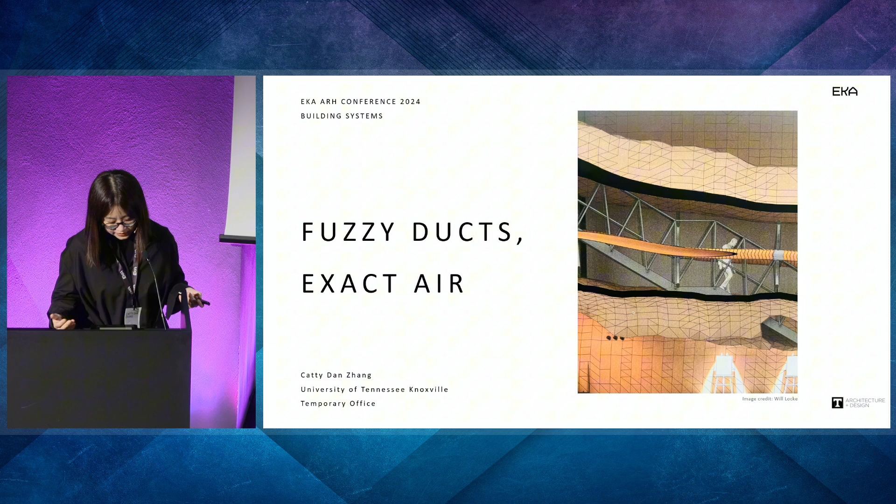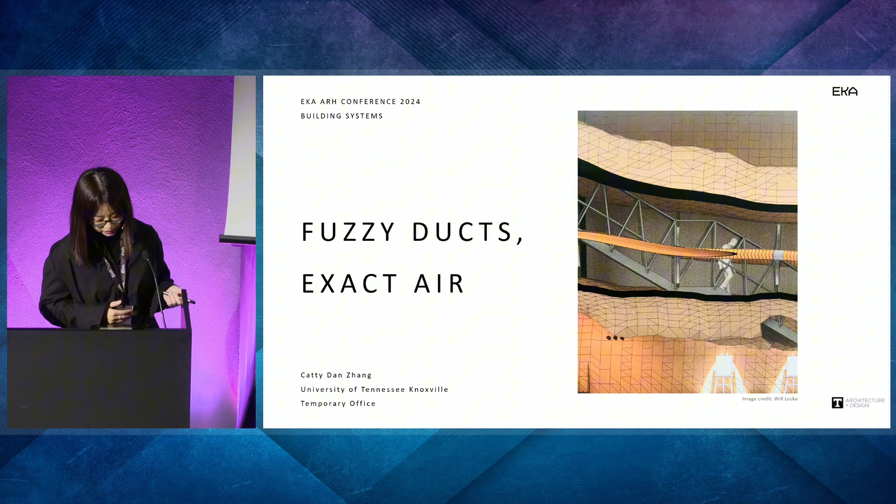It followed the theme Systems and Atmospheres in the curriculum map, which essentially is looking at system integration in building design, and the paper particularly documents the historical context and computational design method explored as part of the course, primarily looking at HVAC and building design to design architecture for air and for people.

Modern architecture employed exact systems, calculated, programmed, and optimized to provide exact conditioned interiors. The most notable example includes air exact, sometimes translated in different words, but essentially offering optimized indoor humidified air at 18 degrees Celsius all seasons.

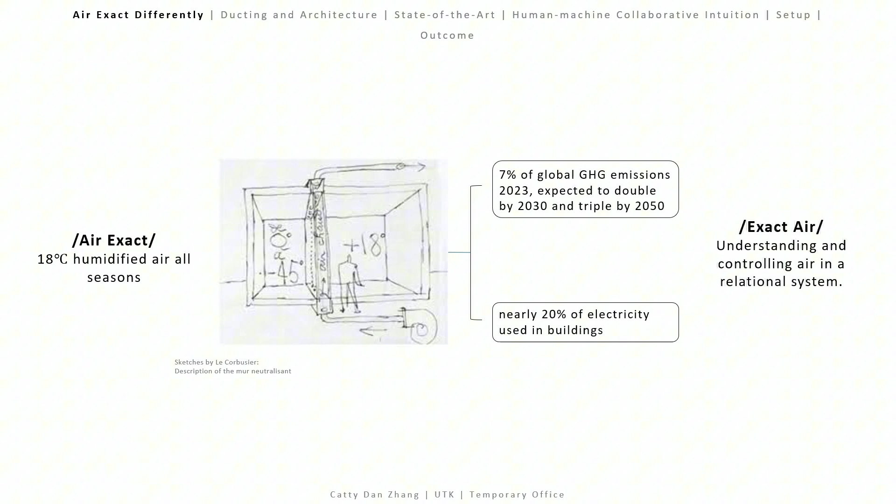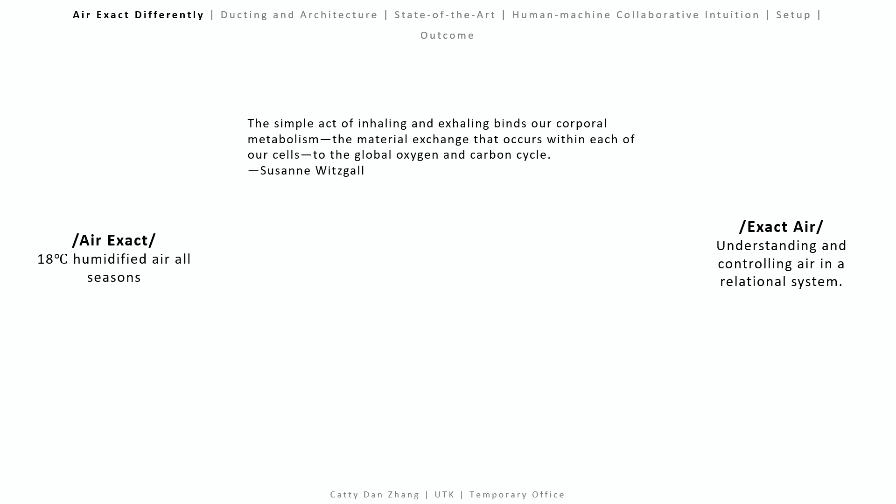We reconceptualize exact air as a critique of the environmental cost of cooling in the building industry, and we argue for the exactness of air to be understood and controlled in a relational system, not as a quantified output provided for inhabitants in space, but rather the specification of its dynamic attributes in the process of its creation and exchange. This is also about accurately recording air as a material moving through spaces modulated by natural or man-made systems, referencing some of the theoretical arguments in the field.

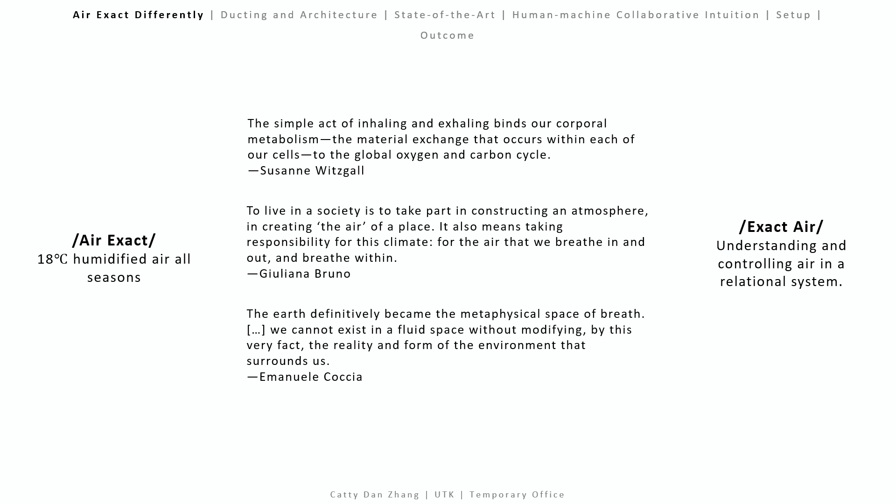For instance, Susanne Witzgall relates inhaling and exhaling to the global oxygen and carbon cycle. Giuliana Bruno stresses our responsibility of creating air for the climate, and Emanuele Coccia points out we constantly modify the reality and the form of the environment as we exist in the space of breath.

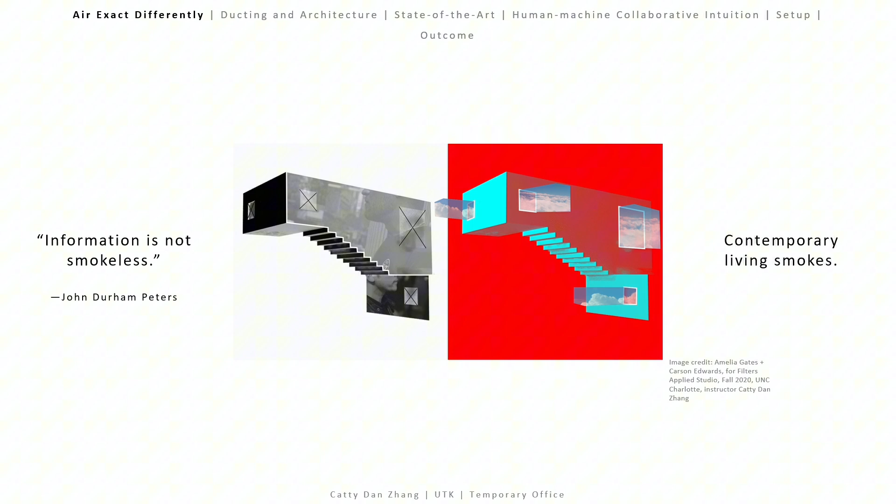As we create domestic personal weather mediated through cooling systems, we inevitably also contribute to the warming rate of the global climate. In that sense, contemporary living smokes, that's the argument we set up for the course, whether visible or not, literal or metaphorical, whether human breath and gas, or CPU and stove.

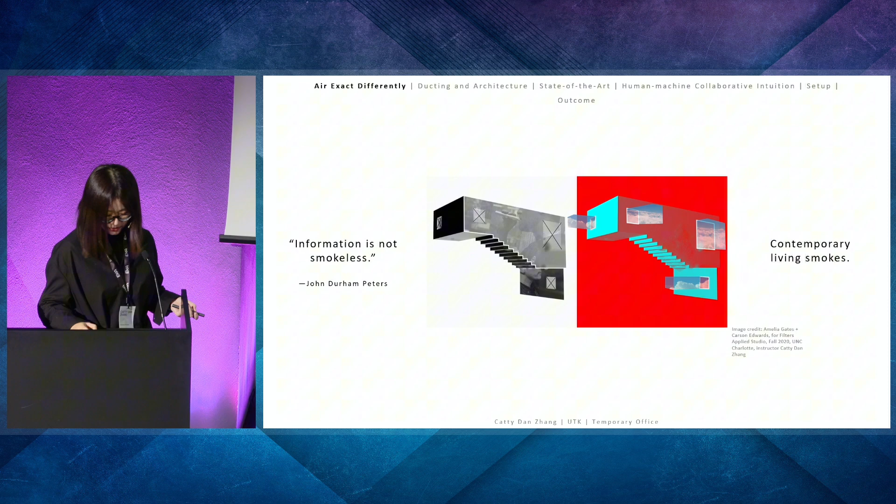And in the Fuzzy Ducts, Exact Air work, we particularly explored digital and physical smoke as architectural material that informs design workflow and decisions. The methodology builds upon systematic construction of air, which I have explored in my own work, as well as teaching, for the past almost a decade.

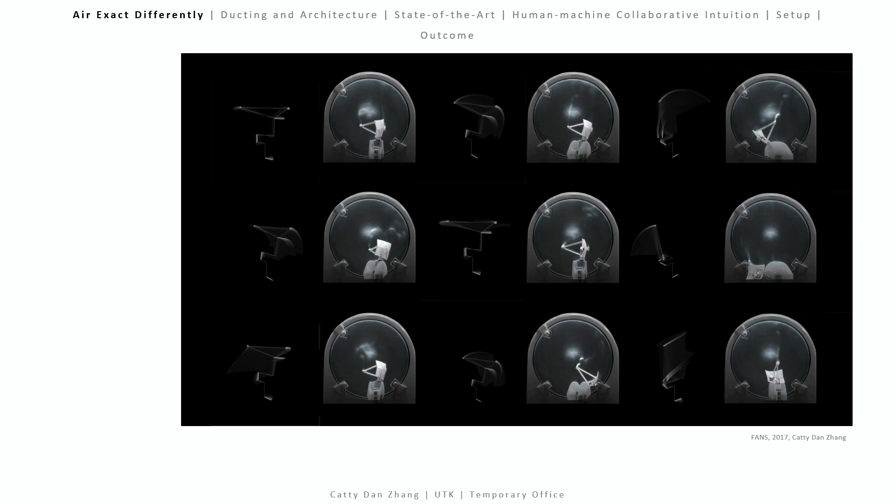These include articulating geometric construction of heat using customized robotic devices, expanding the relationship between points in space and the creation of lines, curves, surfaces, and volumes with the specificity of the materiality of air, as well as digitally revisiting Marey's smoke machine experiments.

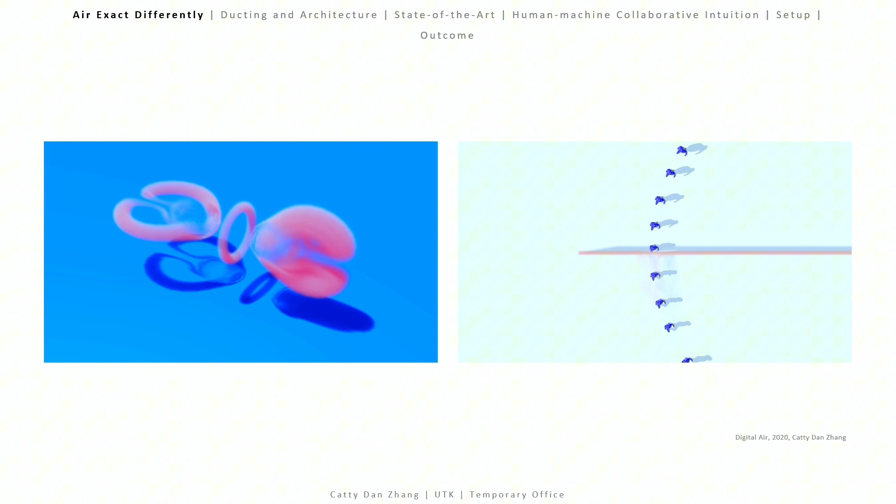Not sure if the video is somehow cropped, but you see a portion of it: constructing air styles that appear as weaving, kneading, knotting, braiding patterns, playing with virtual material attributes and physics principles. Modeling and simulating air forms to understand the material behavior and topological form making, and at the same time as indicators of other spatial effects, such as force, movement, geometry, convection, and so on, produced by human inhabitants or by environmental constraints. These parallel a series of pedagogical experiments.

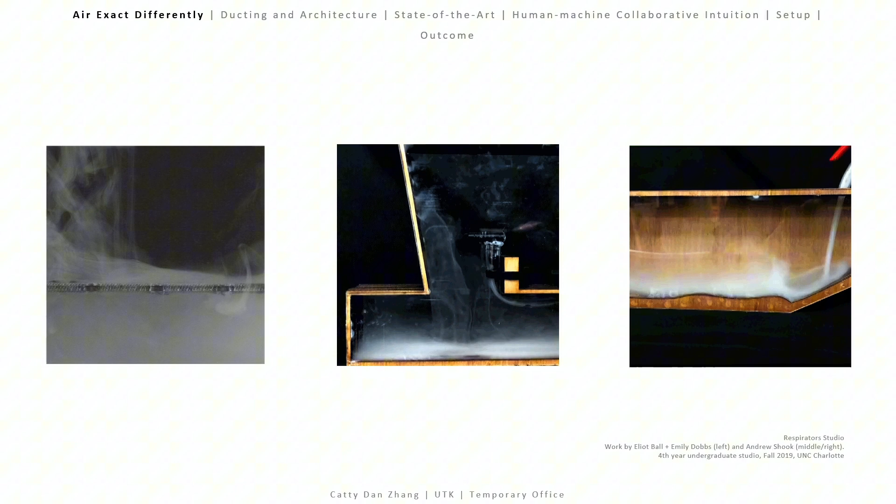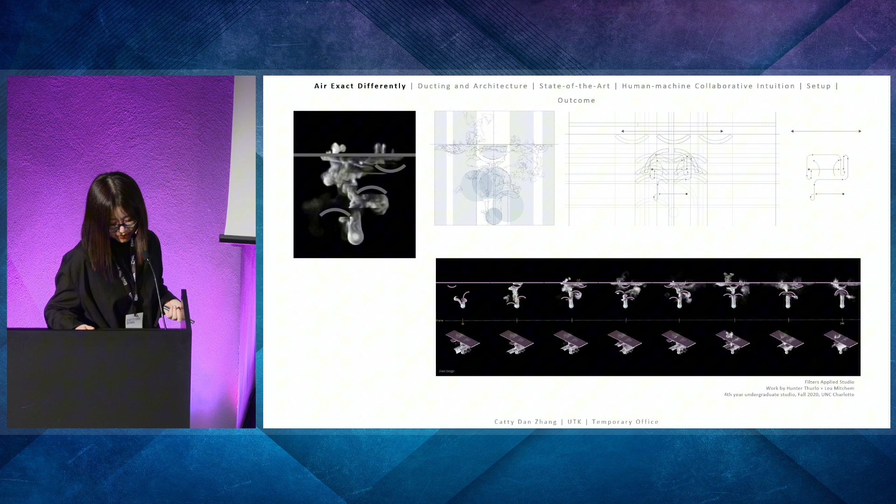In the 2019 Respirators Studio, we explored physical smoke and sequential space formation through arrangements of surface colliders. In the 2020 Filters Applied Studio, we explored digital hot air and the procedural workflow of drawing and simulating adaptable spatial systems through deconstructing filters and modulating the emergence of ephemeral hot air forms.

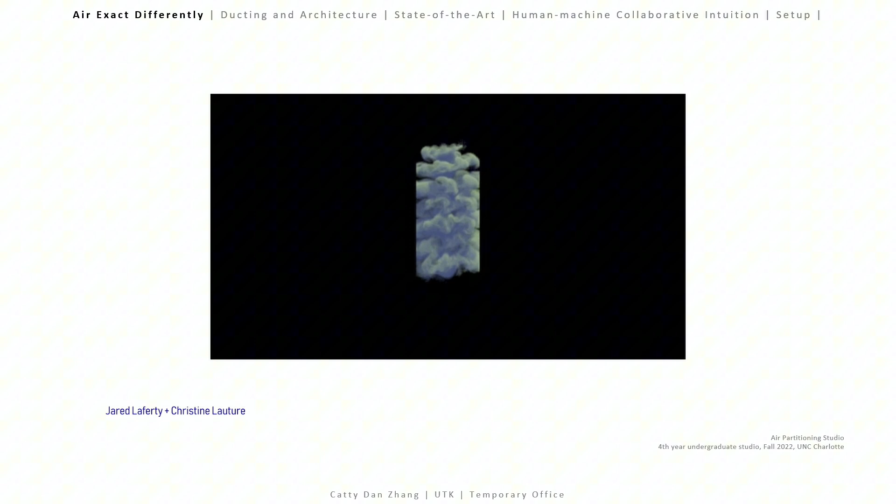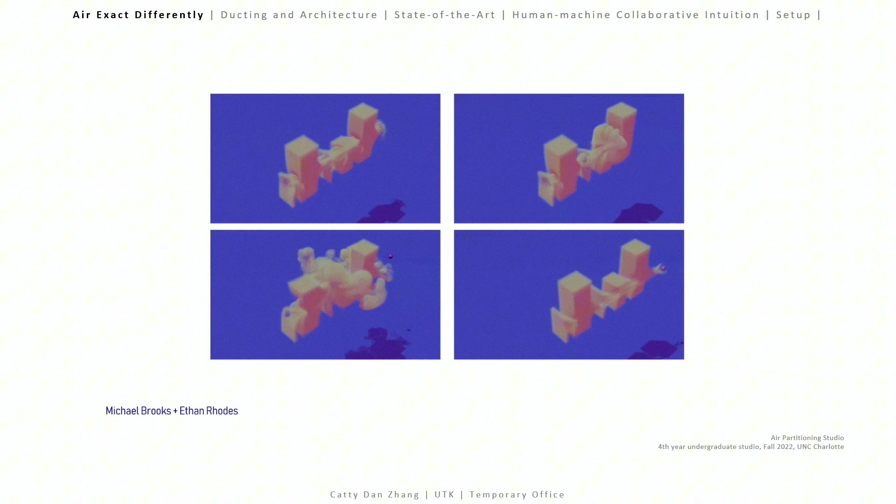And in the Air Partitioning Studio, more recently in 2022, we studied the motion path through geometry as a way of actively participating in constructing the flux of spatial subdivision and reunion, turning the typical methods of material assembly into the play of velocity and vector. People's conception of air impacts the way we deal with the built environment. And these explorations establish intuitive ways of working with air using emerging tools and workflows that are scientifically accurate, aesthetically interesting and conceptually nuanced.

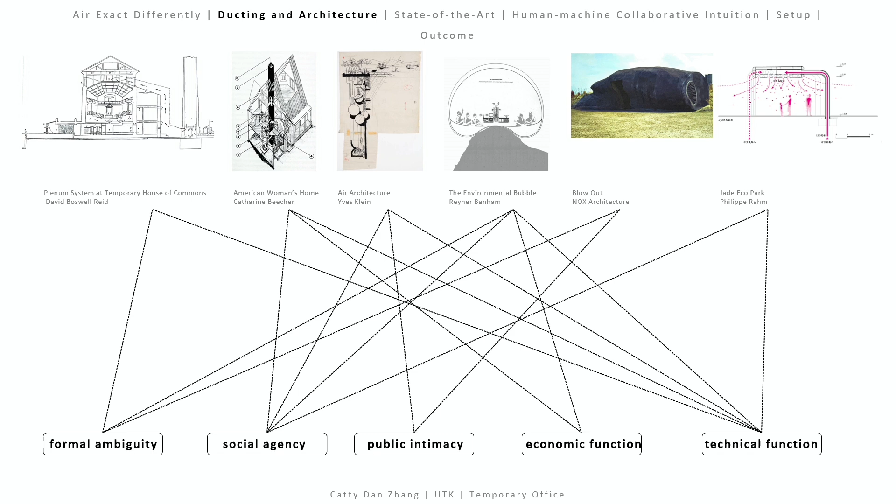For the Fuzzy Ducts, Exact Air Studio specifically, we expand the formal experiment of air to the consideration of designing ducts, air, and buildings as a simultaneous process that is ambiguous and interchangeable. Looking at a long-standing debate and exploration in the field, some listed here, we consider the potential formal, social, public, economic, and technical functions of historical and contemporary examples, and fundamentally revisit the rift between the technical imperative and the symbolic building forms, which still dominates architectural production these days, where advancing and implementing systems for buildings at times becomes merely a symbol or design statement in the conventional design process.

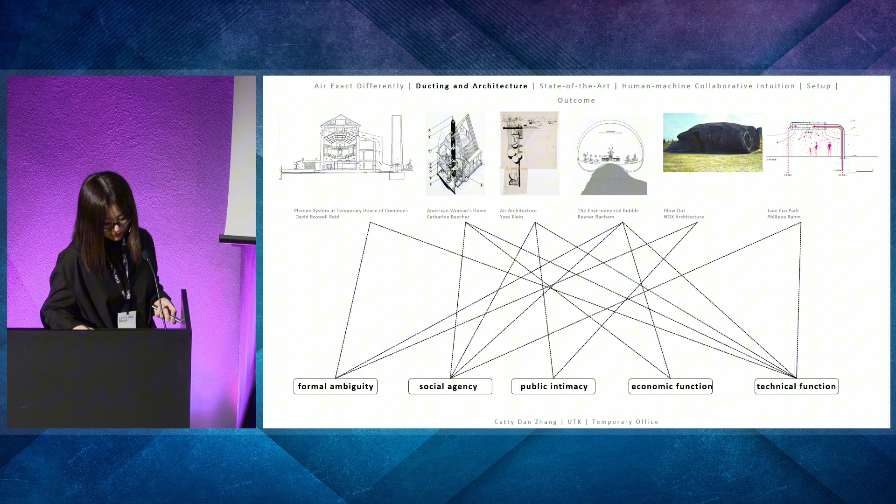Instead, we argue that forms of smoke are fuzzy, therefore ducts are fuzzy, and we stress the necessity to appropriate new geometry, topology, and material, and to adapt to a new collaborative design workflow where systems become atmospheres and mutate into architecture. I'm going to show the slides as a full version.

Since modernism developed ventilation skills, today the intellectual thinking about ventilation still uses the 1960s logic. And that reflects in various current computational approaches, more traditionally listed here, such as CFD, FFD, or approximation or prediction-based models using deep learning.

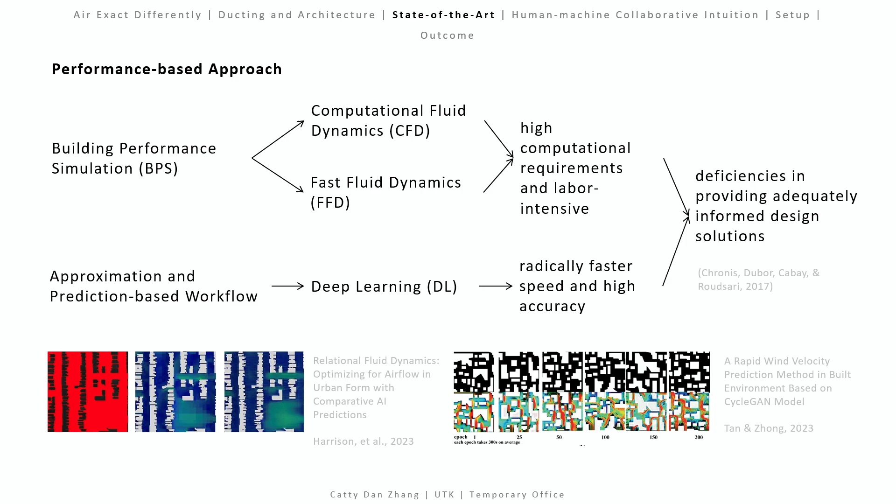Not getting into the details of comparison right now due to time, but overall, although current approaches present various strengths in analyzing and predicting airflow behavior at various scales, they fundamentally are deficient in terms of providing adequately informed design solutions at all design stages due to the required embodied knowledge of the precisely defined design problems based

on form and performance. And we also look at, in comparison, the generative AI approach in terms of favoring the strategy of versioning, annotation, differences, co-creating with a user to produce multiple outputs as artifacts rather than a single decision. The challenge now is the field has been expanding and evolving so fast. But compared to where we are right now, generative AI still presents a problematic understanding of physics-based effects. It still cannot replace specialized multiphysics solutions such as CFD.

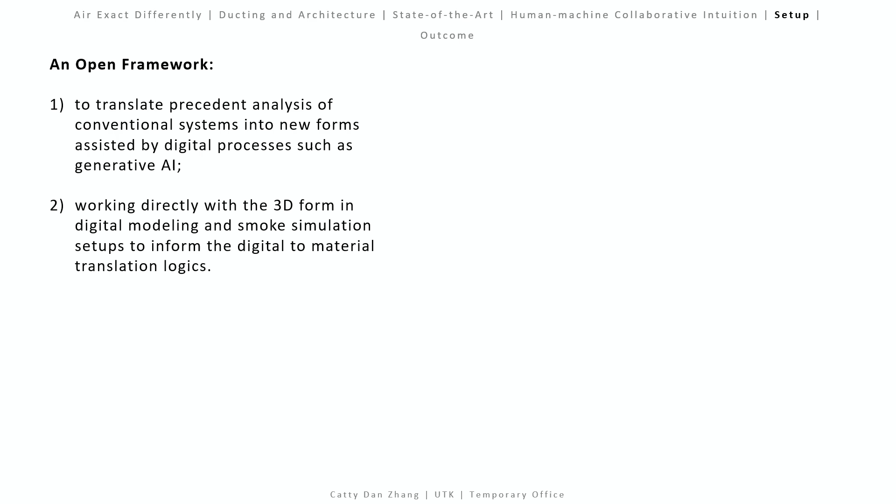So instead we were looking for an open framework, established as part of the course, looking at the challenge of a conventional way of approaching system and form based on two objectives. One is to translate precedent analysis, that is, conventional systems that are well established, into new forms, assisted by digital processes such as generative AI. And then we also would like to have a way to accurately assess, or at least a scientifically accurate process of assessing, some of these experiments.

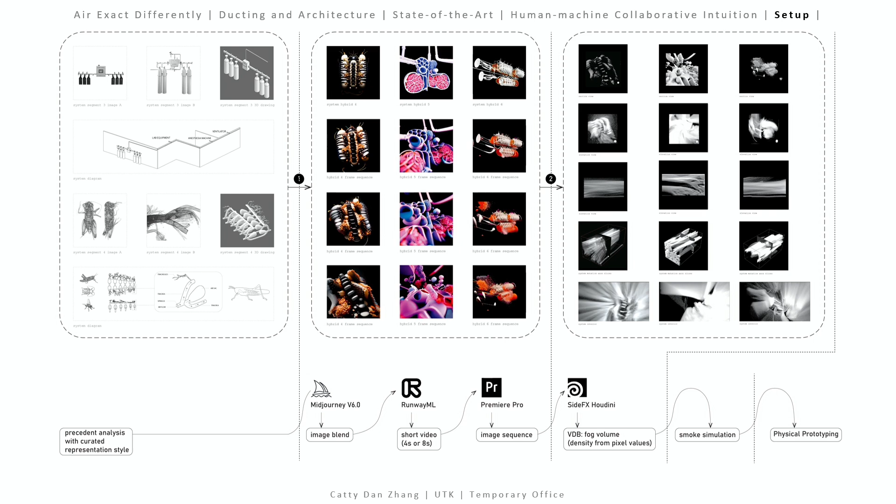So we established a procedural pipeline that utilizes strengths across computational platforms instead of a singular tool. And I will share some of the examples real quick. These are some of the hybrids of curating images and drawings of precedent systems, of buildings as well as in nature, then hybridized with Midjourney, animated using Runway, translated into volumetric conditions and simulated in Houdini, then materialized with off-the-shelf materials and products, turning into building proposals.

An example of hybridizing ducts utilizing some of the generative AI processes I just mentioned. The pixel intensity of Runway videos is translated into voxel density and compiled into a 3D fog volume. The parameters of the morphing figures of the video, such as distorting range and speed, directly relate to the final 3D form. Here is an example of the studio project where the student weighed various factors of the outcome, including cavities of the path of the flow, as well as the sectional transition, to achieve an interesting form.

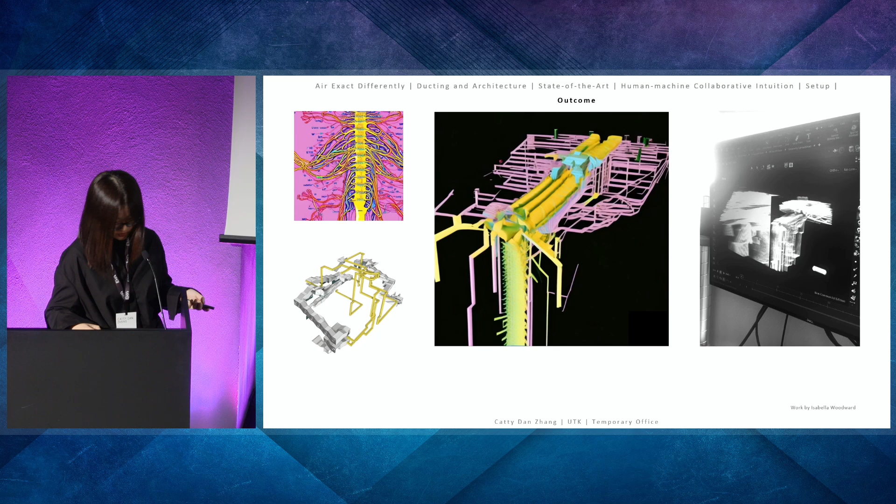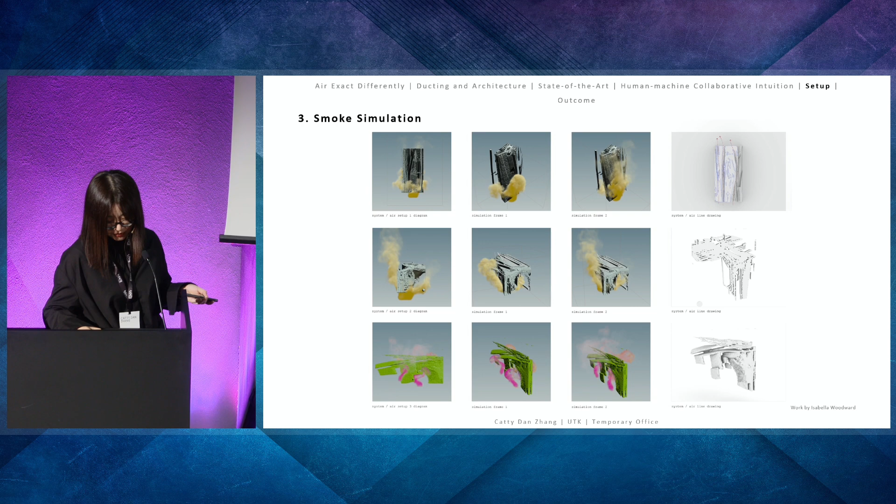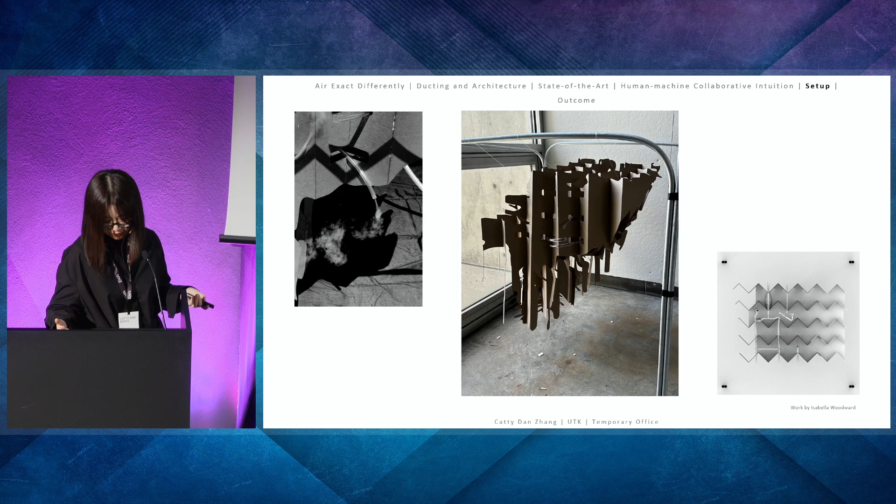Some of the drawings, which were then turned into meshes and surfaces, further operated upon and sliced along different axes to study their functionality interacting with smoke, a process oscillating between the mutated form of ducts and the material properties of air using smoke simulations. Small prototypes and larger prototypes, and rather than using a one-to-one form translation, since there's no point in translating simulated air forms into a physical environment, we're looking at a system approach.

I know my time is up.

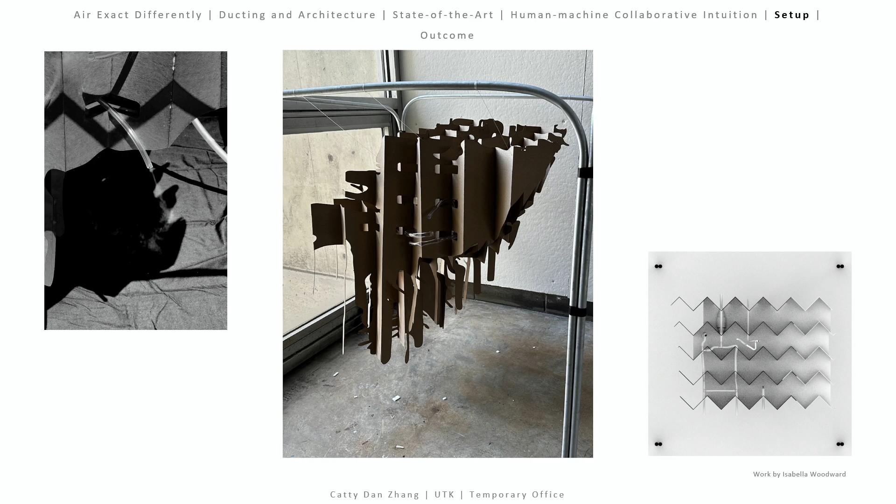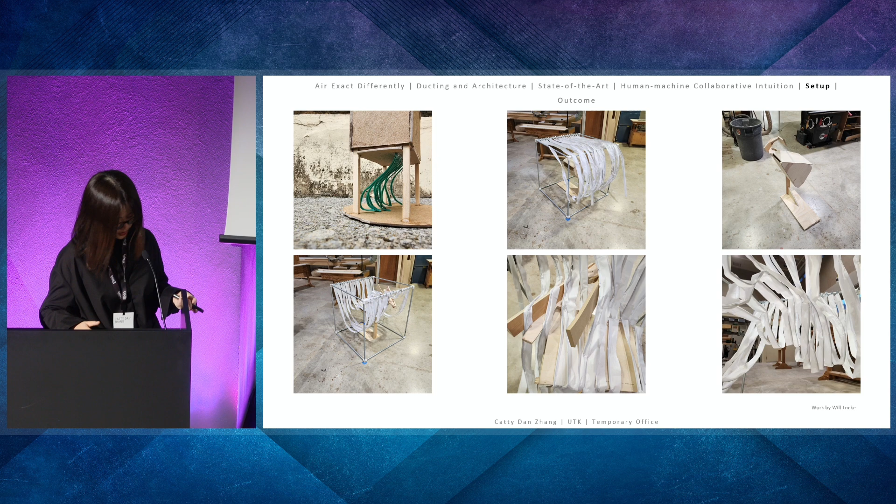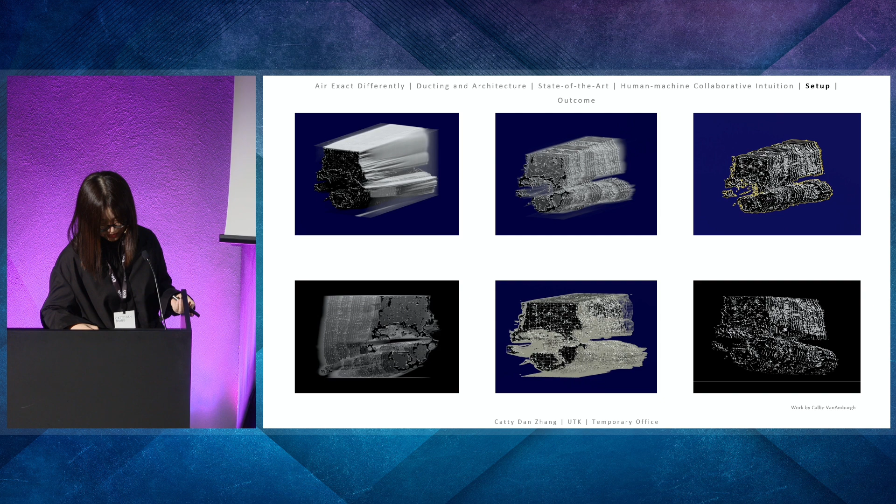And we employ a low-tech strategy and adaptable method to fabricate into larger solutions, with locally sourced material, and each project developed tectonics and frameworks in their own ways. Quickly running through some of the key discussions, including what is fog, representing a medium flowing through spaces, and what is surface, which can be seen as forms of ducts.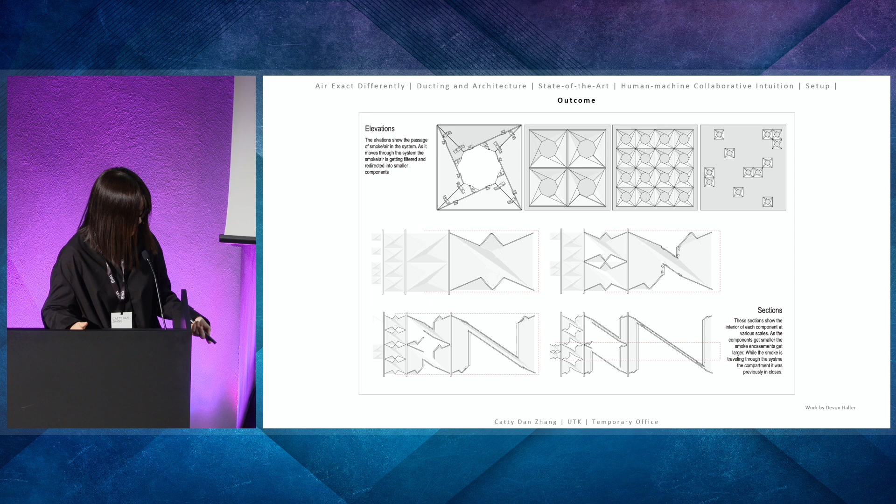So running through a quick showcase of the translation of geometry as well as scale, and I'll jump to the second one, and then I'll conclude. The workflow is quite preliminary due to the time constraint, so we tackled a lot of steps, from the present analysis to the final architectural scenario.

But fundamentally, what I want to argue here is that constructing air systematically is essentially the same as architectural fundamental geometric articulation. If we cannot think about constructing form and space without knowing how to put points in space and construct lines and curves, then we won't be able to make a tangible environmental approach without understanding how the basic form of dynamic mediums, such as air, can be created systematically. So it is the most fundamental element to work with, and we should radically rethink what our agencies are in bridging the gap between different fields with assistance from emerging tools.